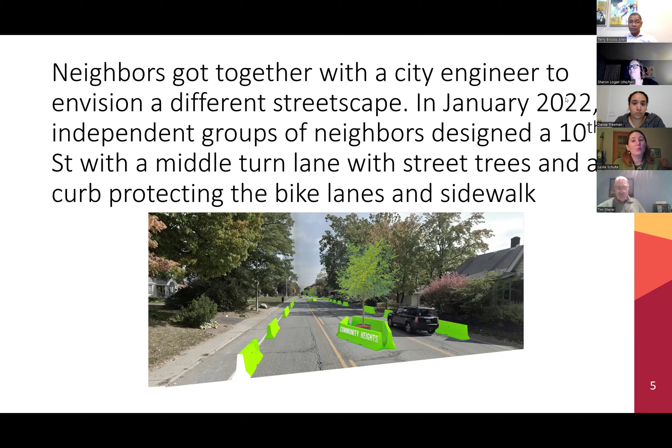We have had several houses hit along our one-mile stretch of 10th Street. This was January of 2022. After 18 months of discussion with DPW, in July of 2023, we installed a center turn lane, street trees, and water walls protecting the bike lane.

We had these professional photos taken, and we'll talk about that later. This is a key piece for public perception of the success of your project, to get these really nice photos taken. We collected data before and after. This is a speed study, which we'll also talk about later in more detail, that collects the speeds drivers are choosing.

The speed limit is 35. Each of these red squares represents a driver. The majority of drivers are exceeding the speed limit with the current design. With our boulevard style design, with street trees in the center and lane narrowing protections for the bike lane, we see that the majority of drivers are now choosing to go just under the speed limit.

So hopefully I can get that smooth transition. Isn't that nice? I'm gonna play it one more time. Wonderful.

There's also this 85th percentile speed, which is a speed that DPW engineers requested we record for them, because it is what engineers use to set speed limits. Before, the 85th percentile speed was 42 or 43 miles per hour. You pick the speed closest to this 85th percentile, and in that case, this road would be expected to have a 45-mile-per-hour speed limit. Very few people actually want the road to be 45.

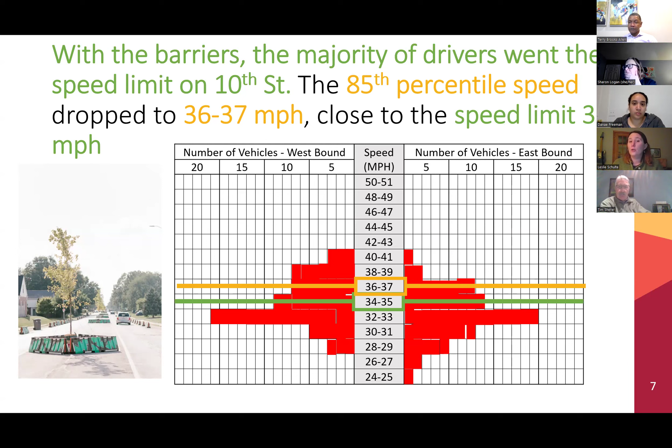After we installed this, the 85th percentile became 36 to 37 miles per hour, which is appropriate for the residential street that we have. It fits the context of single and multifamily homes lining the street. It's not a major arterial. It is primarily used by folks who live on the east side. It is not a highway.

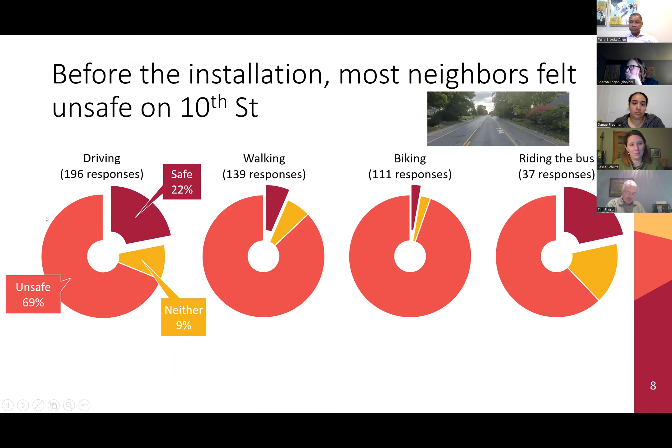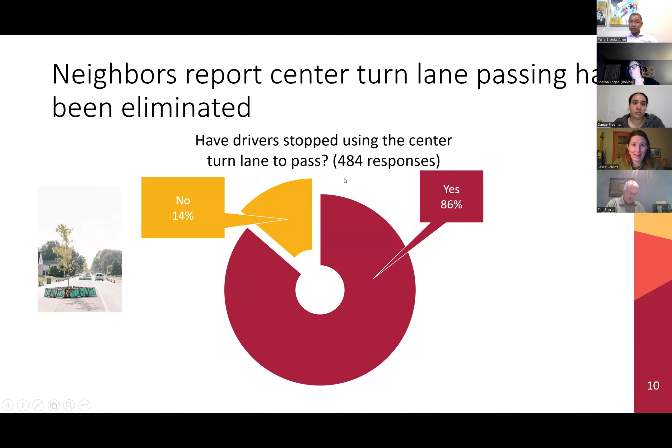Before the installation, with the drag strip that we found, the majority of drivers—and we had more than 200 responses—felt unsafe driving, walking, biking, or riding the bus. No one likes this street. Afterwards, the majority of drivers, walkers, bikers, and folks riding the bus said they felt safe. They reported on center turn lane passing: 484 responses, 86% of those, nearly 500 people, said center turn lane passing had been eliminated. And 72% said that drivers were more frequently following the speed limit.

The big takeaway from this, and the part that I hope inspires you to do a project in your own neighborhood, is that in the year prior, the 3-month period before we had the barriers out, there were 30 crashes. For the 3-month period the next year, when we had the barriers out, there were only 8 crashes. This means 3 out of every 4 crashes on 10th Street is preventable. This means we can go from having a crash once every 3 days to about once every 2 weeks.

This is simply pulled from IMPD. We did not record this. The Department of Public Works delivered it for us. It is so satisfying to see an independent agency show that our work made our street safer for everyone.

So with that, that was a successful project we did. That is why I want you to trust me as I walk you through how you can do your own project. The rest of our presentation is going to focus on just what tactical urbanism is, and some examples of it. Hopefully you've already got an idea of where you've got problem spots for driver behavior, and you'll find something in this presentation that might work to solve that problem location.

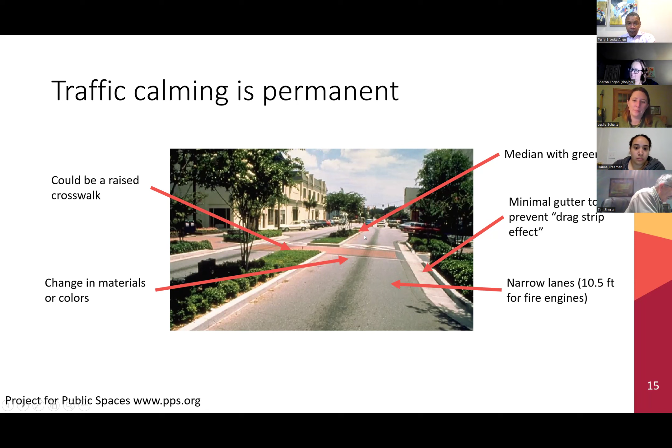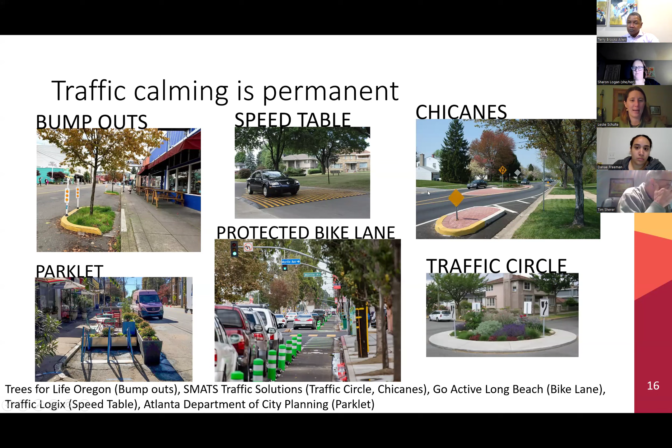So tactical urbanism is temporary. The goal of tactical urbanism is to get those permanent changes, assuming the tactical urbanism works. There's a bit of a cycle where a neighborhood says, hey, I want a protected bike lane. So they complete a test, a temporary test of a protected bike lane, and collect data before and after it's installed. Then, hopefully if everything goes according to plan, the data says yes, there should be a bike lane there, and they get a protected bike lane.

I've got an example here, and I wanted to pull this out because this is what inspired this image of a traffic circle, which inspired our center turn lane street trees. If you choose to use trees in your own project, they need to be watered every day, especially when the temperature exceeds 75 degrees. The streetscape temperature is often 20 to 30 degrees warmer than the reported temperature, so trees dry out very quickly. Don't think you can install a tree and leave it for 3 months - it will die. You've got to keep them watered.

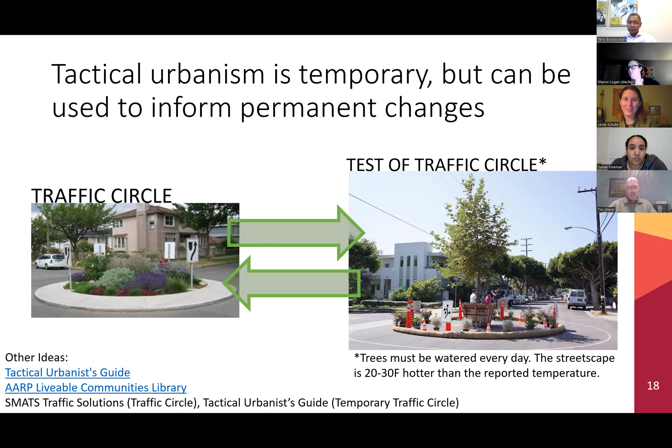This type of material has reflective beads in it, and those beads light up at night. So you have a nice indication to drivers - whether it's daytime when you see the bright colors, or nighttime when you see all the reflections - that this is an area where you need to pay attention.

Art in the right-of-way permits don't require any data collection. However, they also aren't meant to induce permanent changes. We found that the mural alone did not seem to slow people down. It does cause people to pay attention, which is good. However, a lot of our problems around speeding and reckless driving are not solved with just paint. There's got to be something else, some other component in the road.

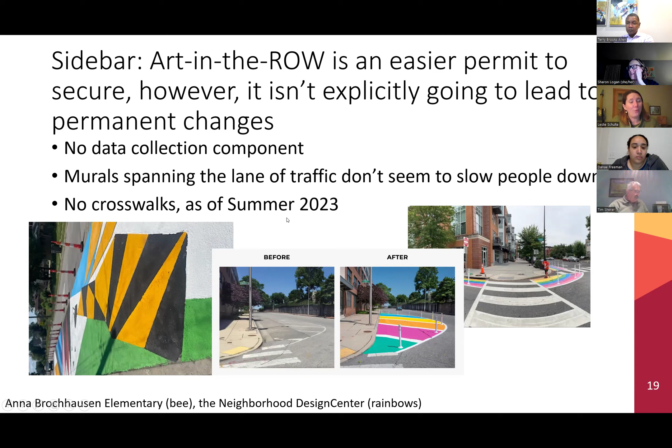Also, as of summer 2023, the Department of Public Works will not issue a permit for crosswalks. You can find lots of examples of really cool crosswalks in cities across the nation, but at least as of this summer, that was not allowed in Indianapolis. You can paint the whole lane though, and you can paint the whole intersection. Just keep that in mind when you're planning projects.

In order to inform whether or not we should install a permanent change, whether or not millions of taxpayer dollars should be used, we have to collect data. I've put the 3 pieces of data we collected at the top, before and after. We collected speed data in the form of a speed study. We also asked the public, how safe do you feel? And the Department of Public Works generously gave us the crash reports for the months the project was out, the previous year and the year the project was out.

There are other items I wish we had collected - you can collect the number of drivers. Our crash data was incredible - we prevented 73% of crashes.

There is no way the number of cars dropped by 73% with our installation. The capacity of a road is determined almost entirely by the number of lanes. We did not change the number of lanes - there was still one lane going in each direction. We also maintained the ability of drivers to turn left at neighborhood streets to get out of the lane of traffic, and maintained the ability of every homeowner on 10th Street to get out of the travel lane and into the left-hand turn lane to make a left into their driveway. So we don't expect the capacity to change, but we don't know if the number of drivers changed because we didn't collect that data.

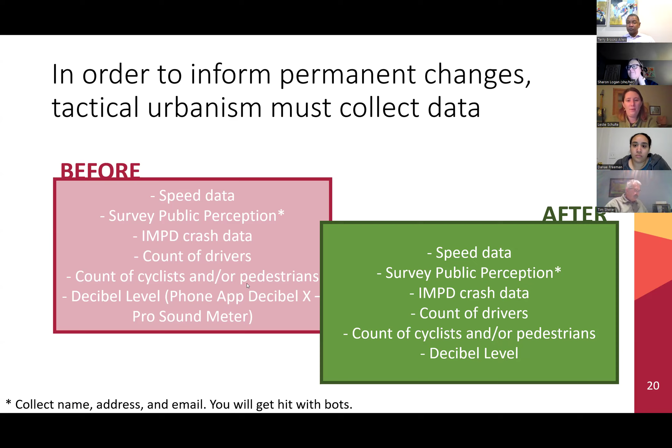All right, the speed study that I showed you earlier, we talked a little bit about it. We're going to talk just a little bit more about this particular data piece that is extremely valuable to engineers.

Speed is recorded with a speed gun. I've shown a Bushnell device that you can get on Amazon for about $100. You are welcome to borrow ours. There's also a worksheet that goes with it, and it's extremely helpful to have two people perform the speed study: one operating the speed gun and another recording the values and keeping track of how many driver speeds you've recorded.

You only record the speed of the driver choosing their own speed. So if you have a line of 5 cars one after another, like ducks in a row, you only record that lead driver, the pace car, because everyone else might want to go faster but can't. They're not useful for measuring how fast drivers feel they should be going, since they're limited by that pace car.

You fill in each square with the speed. In our case, the slowest speed we recorded was 24 miles per hour, the fastest was 51. This worksheet, though, can go much farther, much slower, or much faster.

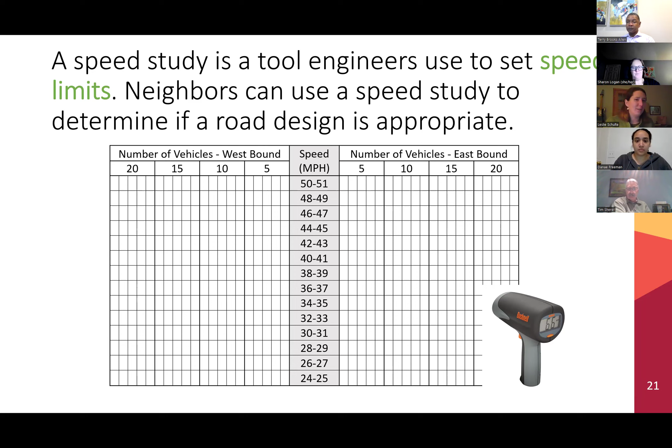I'll include a Word document with our early permit application. If you just want to go through and delete the figures and add your own, that's perfect, you can do that. I'll also include the George Julian 57 one pager that they put out to let the community know what was going on—we'll talk a little bit about that later. There are just a few other items I thought would be extremely useful to have, so you're not reinventing the wheel like we had to.

Okay, so first step, you are going to need a team. We had about 400 volunteers over the course of two summers install these murals, decorate the barriers, install the barriers, maintain the barriers, water the trees, plant the trees. It was a big project.

You do need a lead. Your lead could have any of the skills listed, but it would be extremely helpful to have these first three people be different people.

You have to have one person to organize everyone. For any day of events that you host, it's extremely helpful to have a second in command, someone who can talk to the press, sign in volunteers, answer questions, and direct people to different tasks.

It is also helpful if you have someone with some computer skills. They don't have to be an expert, but these projects do require public input, so you need to advertise surveys or meetings, collect information, and put it in a format that's easy to understand.

Someone with experience with Canva or creating advertisements, someone with experience creating Google Forms or surveys through another piece of software, and then someone with PowerPoint skills—the ability to take screenshots and add shapes to them. Just some very basic PowerPoint, Excel, and Google software skills will get you a long way. And if it's not the team lead, that can be really helpful.

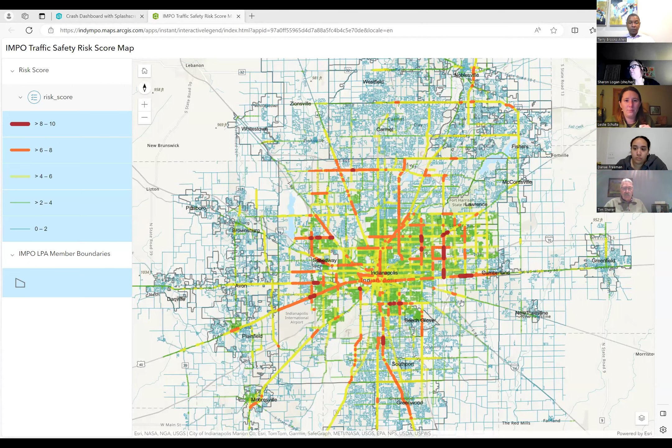So we're going back to the Community Heights neighborhood - we have 10th, 21st, Emerson, and Arlington. You see the green represents a low risk, the yellow is a little higher, the orange is even higher than that, and then the red, the stark red, are the absolute worst sections, those with the highest risk.

So, this is a little fiddly, but if you go in and click on one of these sections, it will tell you what's called the functional class. If it's a minor arterial, we were given a permit for that - that means you can get a permit for that. There's also, if you scroll down here, the AADT, the average annual daily traffic - that's how many cars you can expect per day on this road.

For 10th Street, the one we were issued our permit for, it was 9,539 - we'll round up and say 10,000 cars. We also got one in front of Anna Brochhausen, which unfortunately is one of the more dangerous roads. It's another minor arterial - it only sees 7,800 cars per day.

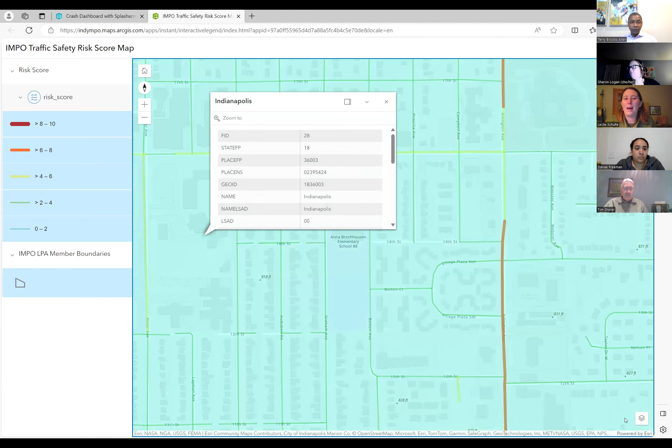And I'm going to screw up here. You see how the whole map turned blue? That's not what you want. That gets you a different layer.

This particular neighborhood street, which is green, only sees 500 cars per day.

All right, so we know 10th, 16th, those are available. If DPW pushes back on you and says that's too busy of a road, tell them Leslie Schulte is helping you out and get me in on your permit conversation. We'll talk to them about it.

Now, a road that would be a lot harder to secure a permit on, especially a first time, would be a principal arterial, a main arterial. This is Shadeland. It's one of the more dangerous ones. It's a great place to possibly make change, but it sees 30,000 cars per day, three times as many cars. That is going to be a very dangerous place to work in, especially for volunteers, and there's a lot of traffic.

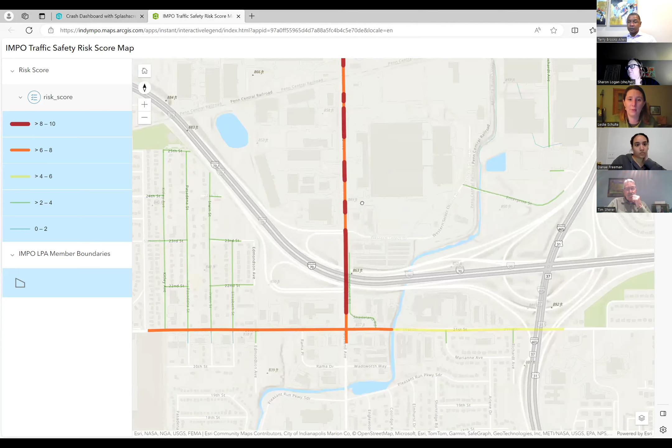I'm not saying you can't go after Shadeland. I'm just saying that's going to be harder, especially for a first-time project. Minor arterial, less than 10,000 cars per day, AADT.

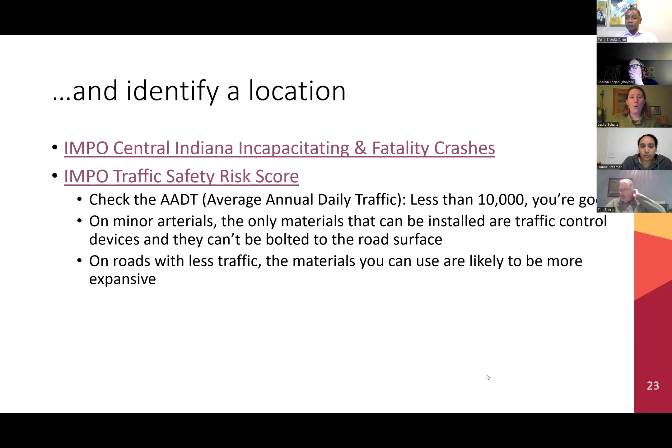We're going to talk about the permit process now, and then we're going to go into a little theory of permits. So the Department of Public Works has a policy. It's 11 pages long, and it describes the permit process. I would recommend you read this, but I have summarized it for you.

As an engineer, I was very good at getting permission. That is my expertise. I got a lot of complaints about artwork. I personally thought we did a great job. It looked amazing to me. I am not an art director, though. That is where I failed.

Maybe you are an art director, or maybe your organization is extremely beautification focused. That is great. Let me help you with this process so you can focus on that part, because if there was one thing I could change, we would have spent one month talking about the permit and six months talking about the artwork. That didn't happen because we spent so long securing the permit. We had to get the grant funds.

So we had to get the grant spent, and so we shaved a little time off that discussion of artwork, which is extremely important to the public.

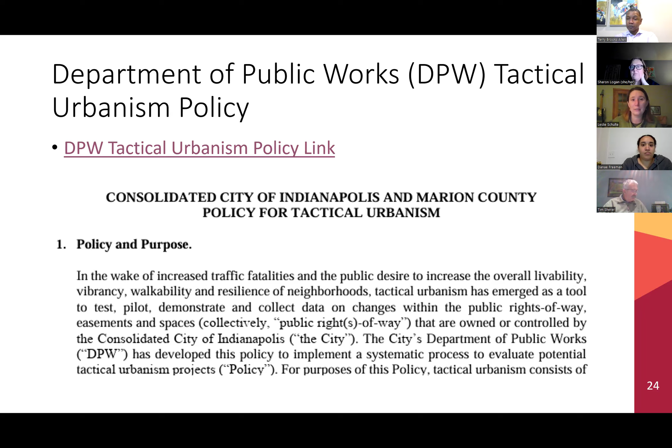Okay, so 11 pages, there's a link here. I'm not going to click on it because I don't want to switch back and forth, but we are going to go through each of the major sections that your permit will have to have. And again, you will get our final successful permit so you can copy paste sections that are appropriate for your permit.

Okay, there are 1 of 4 slides, and these have a lot of text, and I am very sorry. And we are at 1 hour. So I'm going to go through this quickly with the knowledge that there is another session planned for the Indianapolis Neighborhood Resource Center, Neighbor Power Indy, where we are going to have worksheets where you will go through and fill out the permit. The goal of that workshop is that you can take those worksheets and turn them into DPW and get approval.

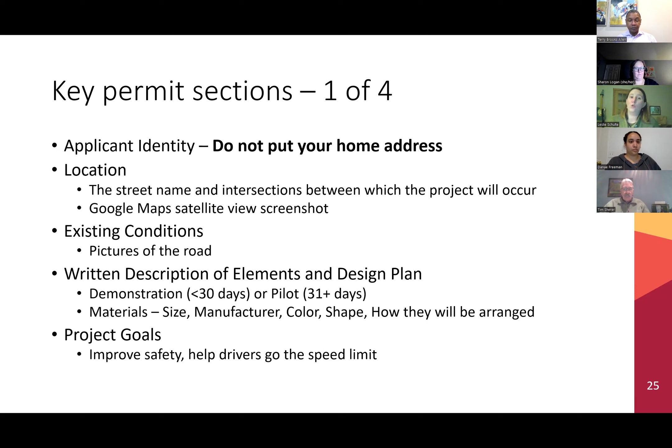You will also have to have a visual depiction of the elements. This is where Google Maps comes in so much handy.

You go to Google Maps, go to satellite view so you can see what the trees are and if there's a median. You zoom in, take a screenshot, and then use squares and circles to drop them on that screenshot in PowerPoint. Super easy. You will have to have an installation plan.

Installations are allowed during tactical urbanism season, April 1st to October 31st. The part that tripped me up, because I am not a civil engineer, was this temporary traffic control pattern. It is not that hard, I have to say, though I'd never done one before.

All they want to know is, will you have safety vests for volunteers? The answer is yes, they'll be working in the roadway. They need to have the bright yellow with the reflectors. We have some that you can borrow.

They will want to know that you're putting up flags that say either road work ahead, workers ahead, or traffic pattern changed ahead. There's lots of different information you can put on these signs, and those are placed ahead of the project so that when cars are approaching your installation, they know to pay attention.

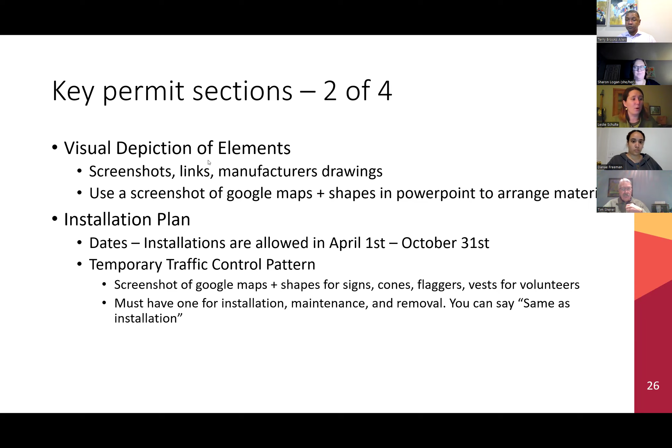And you will still have those signs out that say workers ahead, because those are going to be out the entire time that your installation is in place. You might have cones around to just mark where the workers are performing the maintenance.

Your maintenance plan - there are two types of maintenance that you can have. One is foreseeable and one is what's called unforeseeable, which just means you don't know when it's going to happen.

So foreseeable maintenance for us was trash, watering the trees, and replacing reflective tape that had some wear and tear as drivers would knock it, especially the tape that sat on the bottom of the barriers to make them reflective. They got a lot of dirt and grime, and some of those started peeling off, so we had to inspect those with some frequency and then replace them.

You can say they want to know the proposed frequency. You can say daily, weekly, bi-weekly, monthly, or as needed.

There's also unforeseeable maintenance activity. We know people are going to crash into them, and we know that there's graffiti that happens. So you just have to say we'll remove the graffiti, or we'll remove the device that has graffiti on it in some timely manner within a week. For crashes, within a day.

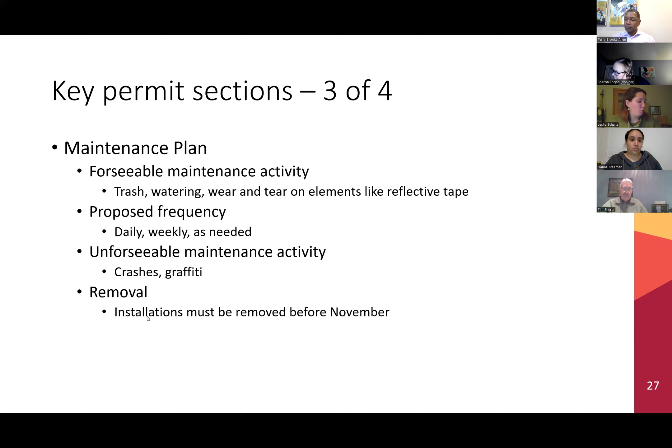And then for removal, you'll have to let them know when you plan to remove it. They do want to see them removed before November 1st.

So talk about the meetings that you hosted to build consensus around what artwork you're going to do or where the installation was going to go. You'll talk about the surveys, put in a picture of here's how we advertised the meetings, here's how we advertised the survey. List your partners, list your funding sources.

We got a lot of letters of support from IMPD, from the hospital in our neighborhood, because those are the folks that respond to these crashes. They do not want to see them any more than we do. We got our city county councilor, the Marion County Health Department. If you can get the Indianapolis Fire Department to write you a letter, that would be an excellent coup.

We have not gotten a letter from that particular emergency service. However, we have been very careful to maintain that 10 to 11 foot, that 10.5 foot lane width required for the largest fire engines. So if you've got a connection there, please work that connection to get that letter of support.

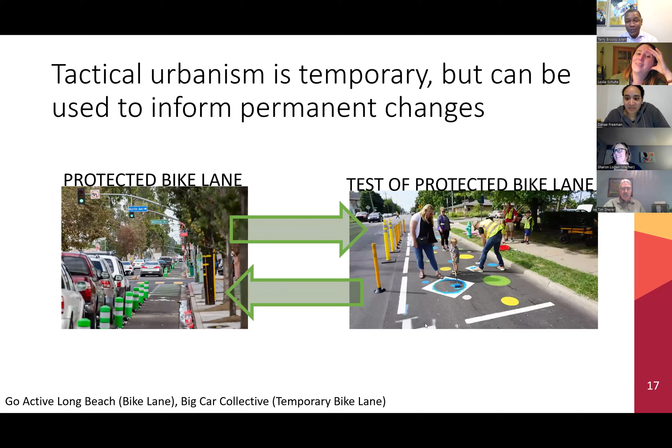I don't think you did. The numbers were steady the whole hour. Yes, the numbers were steady the whole hour. So that was great information. Obviously, people are definitely interested, they're already talking about renting your materials. And then also, thank you so much for the plug for NPI, Neighbor Power Indy. That's awesome, I think your session is going to be at capacity, and the Health by Design session as well. So thank you so much.

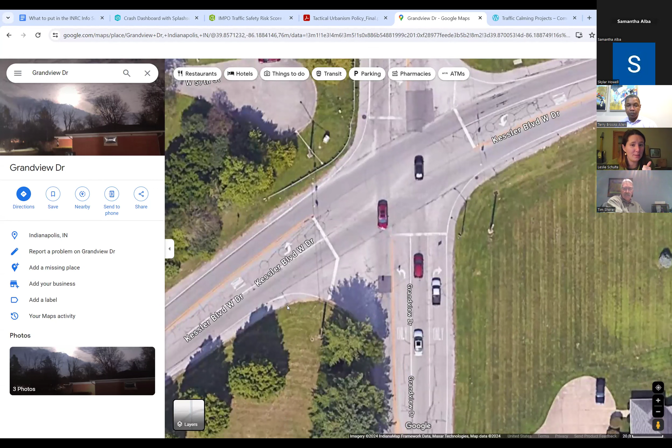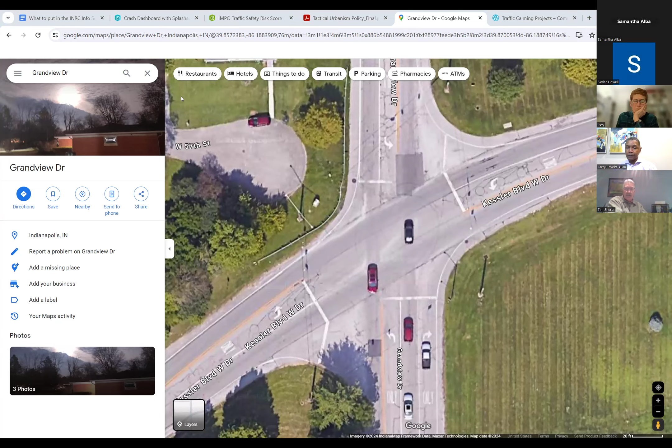I was just going to add, I put it in the chat, but DPW telling our neighborhood that nothing was going to happen is exactly what kickstarted us to do this project. Leslie and others were like, that's not an acceptable answer, so we just took matters into our own hands and did tactical urbanism. Love that, okay, I will definitely send an email. I know we're moving forward with things on Fox Hill Manor for Indy Parks, but my biggest worry was how people were going to access the park safely. So thank you guys so much, I really appreciate it.